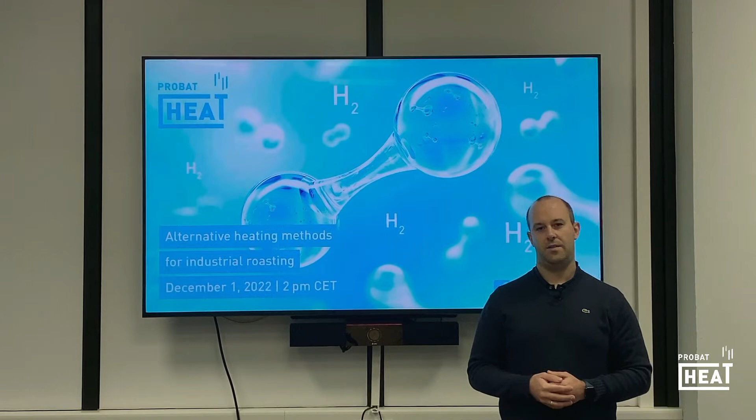Referring to energy, there's nothing new when I say that we are currently in a challenging situation. Rising costs of especially natural gas due to the scarcity and of course requirements regarding sustainability following the trend of decarbonization, so to get rid of the fossil fuels, requires more or less rethinking of energy provision and of course its use.

As the world leading supplier for coffee processing systems, PROBAT is going to meet these challenges with the development of innovative products. And therefore, we of course are able to implement alternative drives to our roasting systems. At our Connected Market Symposium in September this year, we have presented the first hydrogen-powered roaster, our beautiful P05 hydrogen, and we would like now to give you a short view on the event and to show how the customers were able to get in touch with the roaster itself and of course to taste the coffee roasted on the hydrogen powered roaster. Enjoy!

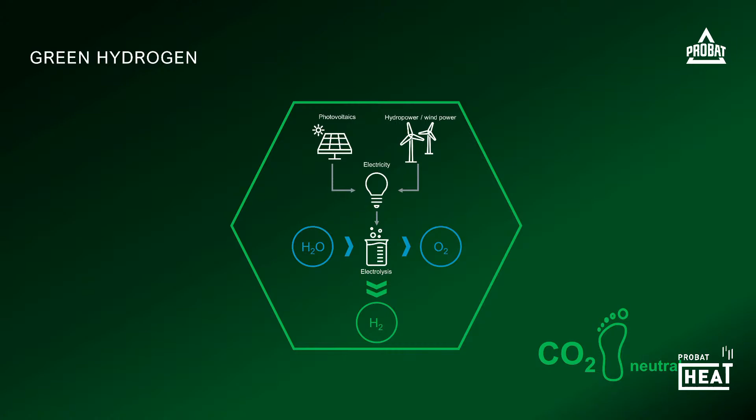And if the electricity comes from renewable sources, then we are talking about a CO2 neutral process for the green hydrogen. So I guess green hydrogen is the future to really get rid of all fossil fuels.

But the next one is gray hydrogen. This is actually the type that dominates the market. It is obtained from fossil fuels, so crude oil, coal, natural gas. And under heat, the natural gas is converted into hydrogen and carbon dioxide. And this is also the disadvantage, that we have a huge volume of carbon dioxide that is more or less part of this process.

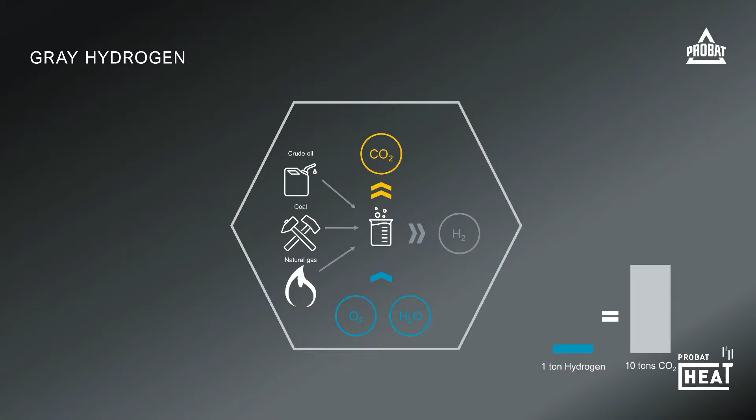So when we are producing 1 ton of hydrogen, there are 10 tons of carbon dioxide on the negative side of this process. So it is like burning natural gas in the first place. Yeah, exactly. Okay. So there is an improvement of gray hydrogen. This is called blue hydrogen.

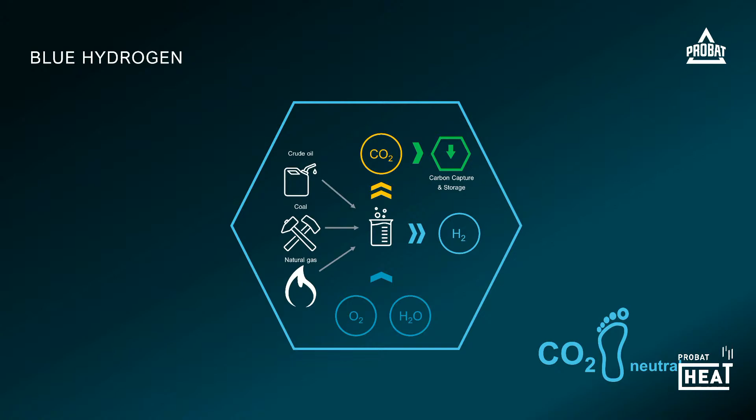This is almost the same process, but the CO2 does not go into the atmosphere, so it is captured and stored. The process is called carbon capture and storage, or CCS for short. And so in the balance, we can also state that blue hydrogen is CO2 neutral. But you should prefer the green one if you want to be net zero. Net zero is, I guess, the green one, the long-term solution, and of course the aim of everything. Customers.

Okay, perfect. So maybe we can give, because I guess this would be interesting, the other colors. Maybe we can jump back to the overview. Yeah, that would be my question as well, just to make it clear. So we have talked about the green hydrogen, the blue hydrogen, and the gray hydrogen. So just a rough explanation about the other colors.

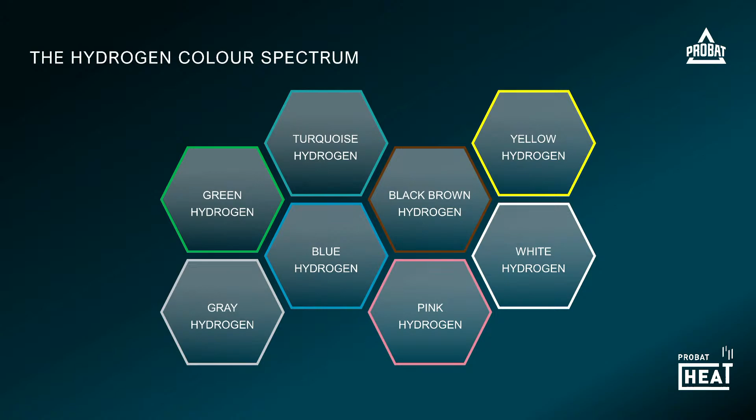So pink hydrogen is where the energy comes from a nuclear source. Then the white one is more or less a waste product from other chemical processes like fracking. The black and brown is the use of coal as a single source. The yellow one is a mix of renewable energies and fossil fuels. And then the turquoise hydrogen is a pyrolysis of methane, as a part of natural gas, into hydrogen and of course solid carbon.

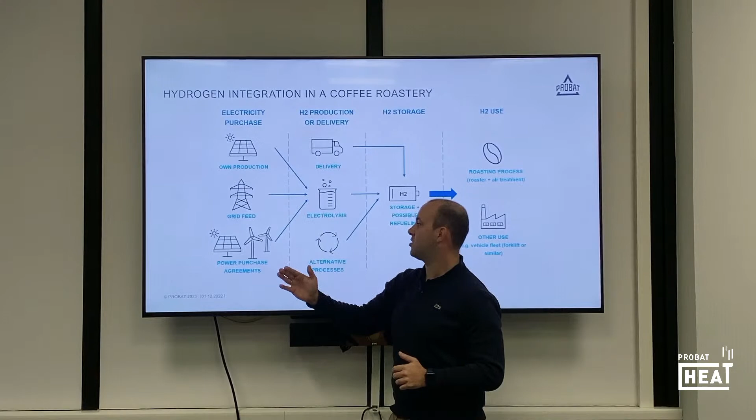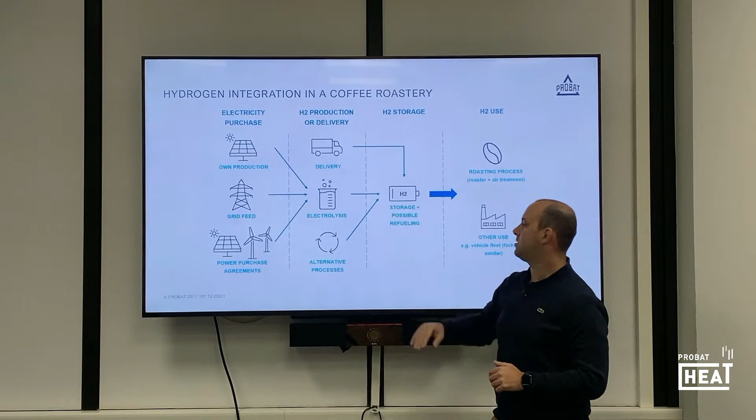Okay, so now I would like to go further to show the potential of hydrogen within a coffee roastery. So I will jump to the screen. So at the first stage, we have the purchase of electricity options. We have our own production or a grid feed, or maybe other power purchase agreements. This all ends up in a process. As an example here is the electrolysis process, or you can also state alternative processes. This would be the production itself.

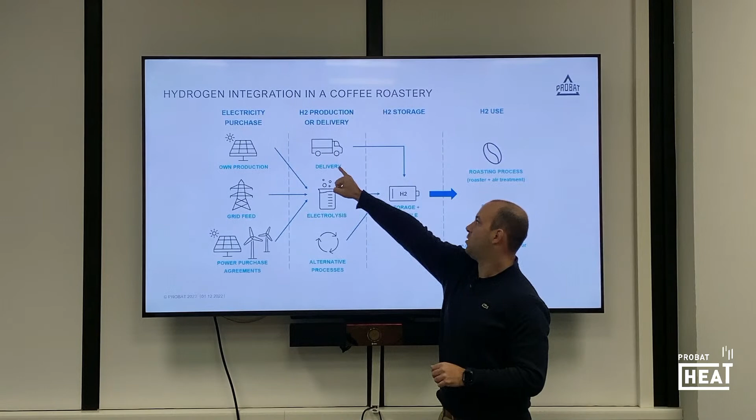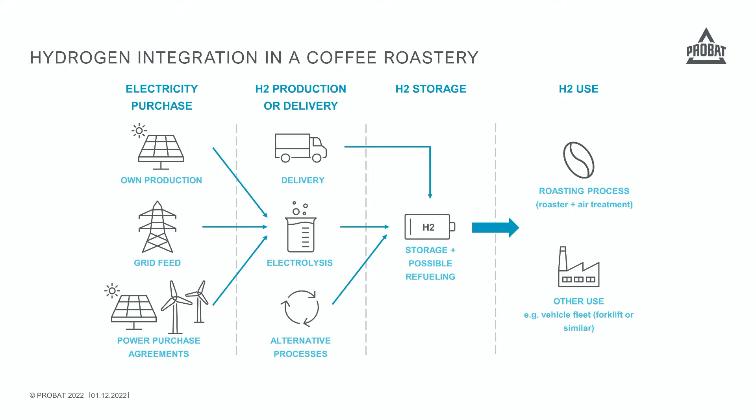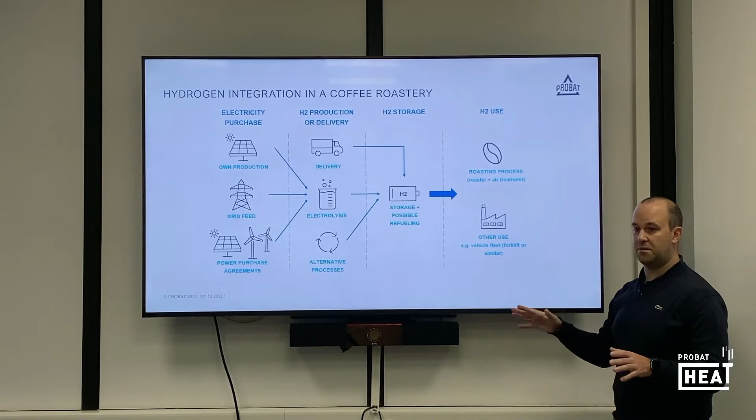Another option would be the direct delivery of hydrogen. Then on site there is a storage system where we can store hydrogen and be able to refuel it. And then we can use the hydrogen for several parts inside the roastery. So as we already said, it can be used of course for the roasting processes, so the main burner, air treatment systems of course, but there's also a potential maybe for vehicle fleets, forklifts, etc. So we can feed not only the roasting process, there are other points where we can use hydrogen. So these are the basics.

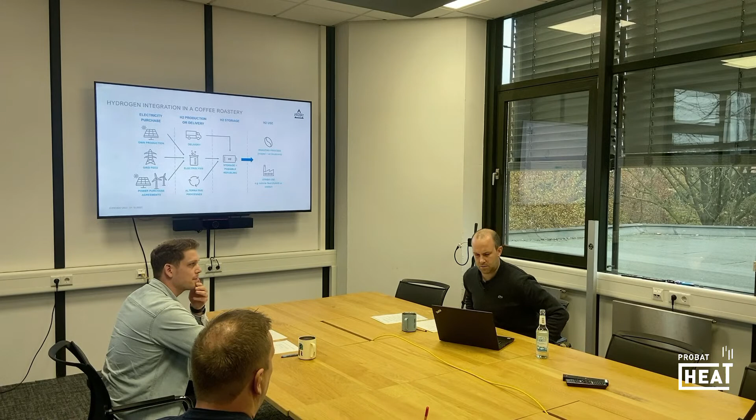So let's talk about some characteristics of hydrogen. Maybe the point emissions is very important, I guess. So what is really the advantage or the advantages of hydrogen? Yeah, the biggest advantage obviously is that the combustion does not produce any carbon dioxide. So if you have green hydrogen, then the roasting process does not produce any carbon dioxide from the combustion. And this makes it easier, especially if you are based in Germany, to comply with the TA Luft, the German Clean Air Act, and you can make your roastery net zero.

And it's future-proof. As you already mentioned, Mark, hydrogen is the most common element in the world, so it is practically infinite. Hydrogen can be produced on site, so you are very self-sufficient, you are completely independent of delivery. And another big thing is that hydrogen has no influence on the taste of the coffee. I guess this is the most relevant point of view. Yes, of course. The coffee is also great from hydrogen roasting.

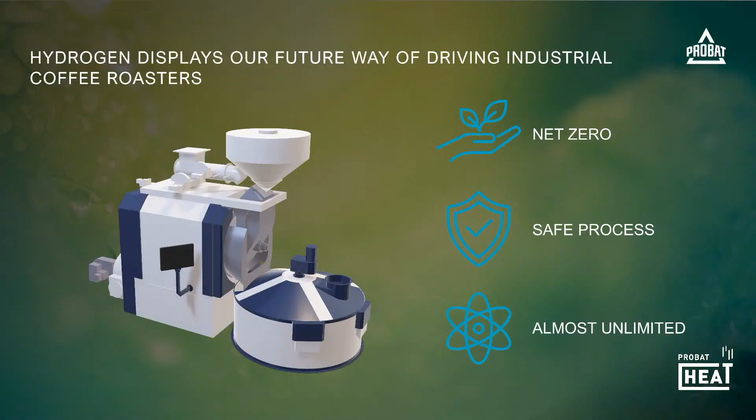Yeah. And then I guess a very important topic is safety. So when we had the symposium here in September, a lot of customers were asking, is it safe to roast, to handle, or to process hydrogen? What is our answer about that? First of all, you can say the use of hydrogen is safe. You can use it almost like all other fuel gases, so it's stored in a tank or in a container, and then you deliver it through your pipes to your roastery, so almost the same as other gases.

But the customer has to consider some things. Since you can't smell hydrogen, you have to check the gas control line once a month with a leak detection spray. And the leakage rate is slightly higher than that of natural gas, but it's still far below the limit at which a dangerous environment can arise. Nevertheless, you should consider good ventilation of your gas pipeline, but it's all the same as with natural gas.

And about the safety systems in our roastery, I think Peter can tell some things. Transfer to the roasting system. Of course, in general, for new plants or for new roasters, it doesn't depend on the burner type. We support the actual regulations, and therefore all the safety measures contained in the regulations. But what is special to hydrogen?

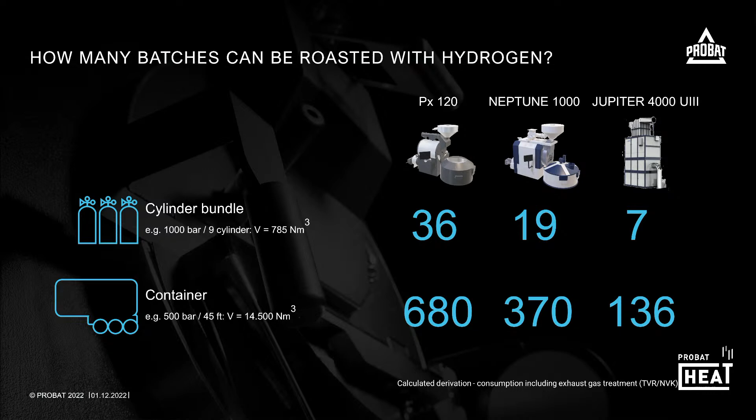I guess these figures underline the solution that we just mentioned, a dual fuel system. Yes. So we are able to roast on hydrogen, but we are also able to roast on natural gas. When we are talking about the PX120, we can roast almost 36 batches. So maybe at 25 batches or so, the customer is able to phone his gas dealer: bring me one more cylinder bundle. And he's able to switch to natural gas, and when the bundle arrives, he's able to switch back to hydrogen. Yes, that's good. That's possible.

Okay, so I guess we have addressed the topics that we wanted to talk about today. To our viewers, we hope that we have made the topic more clear to you, and we're really looking forward to working with you on future projects. We at PROBAT are fully convinced of the technology of hydrogen. We have implemented the technology in all of our roasting systems, including the main burners and of course the air treatment systems. So we can state we are ready. We are waiting for your contact. If you are considering using hydrogen, please get in touch with one of our area sales managers. We can start bringing your roastery into the future.